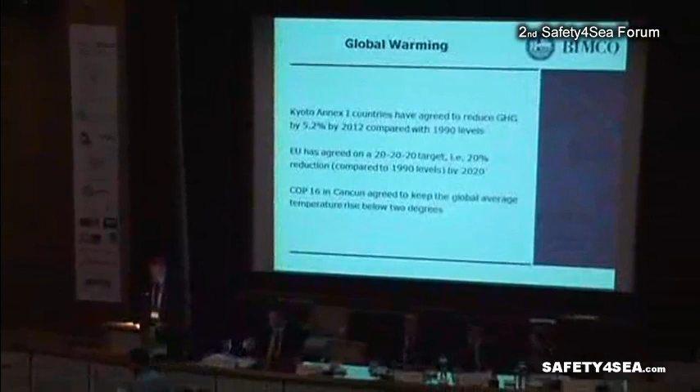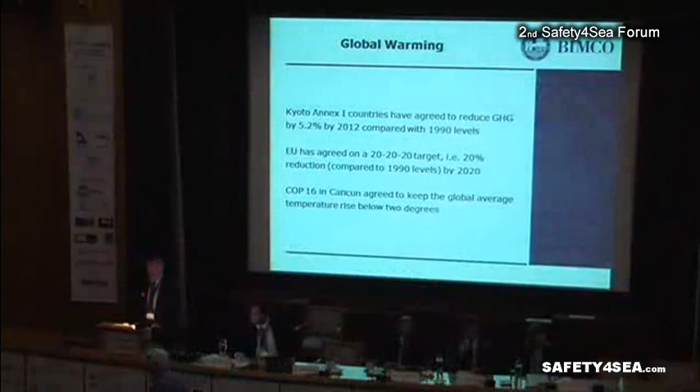Global warming and climate changes have been high on the agenda for many years, but what has been done until now? In the Kyoto Protocol, it was agreed that developed countries should reduce their greenhouse gases with around 5% by 2012. However, countries like USA and China are not part of this agreement, and it's not very likely, even if the 5% is reached for the countries being a part of this agreement, that the effect is particularly significant.

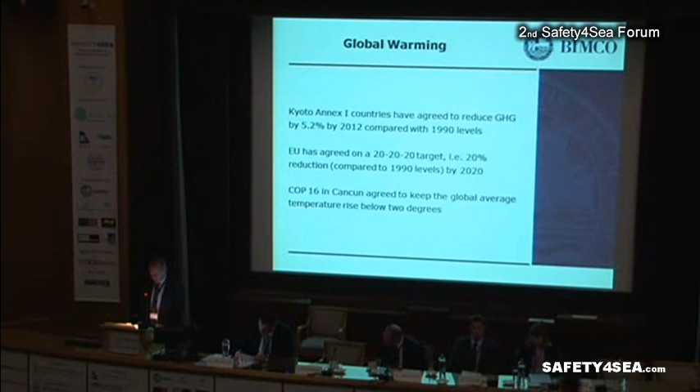EU has made their own targets and intend to lower their emissions with 20% by 2020. Baseline is 1990, and it seems very unlikely that, except for a few countries, the target will be reached, at least as an in-sector reduction only.

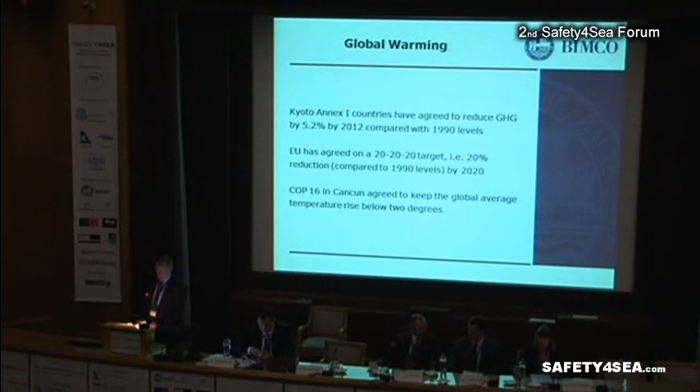Even though the result from the COP16 in Cancun was rather limited, it was agreed to keep the global average temperature rise below 2 degrees compared to pre-industrial period.

So, how much does shipping contribute to the global CO2 emissions? The second IMO greenhouse gas study was launched in 2009. The conclusion in this study was that international shipping contributes around 870 million tons of CO2, or around 2.7% of the global total CO2 emissions.

However, if nothing is done within shipping, the contribution will be around 2 to 3 times higher in 2050. If global warming is not to exceed 2 degrees in 2100 and all other industries comply with this target while shipping does nothing, then shipping will contribute 12 to 18% of the total CO2 emissions by 2050.

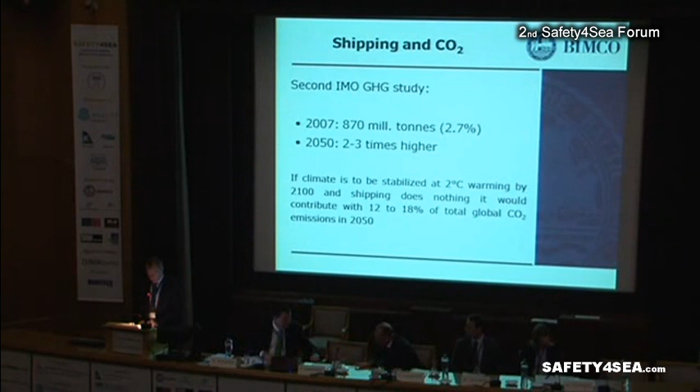So even though the shipping sector transports around 90% of all cargo and only contributes to the global CO2 emissions with less than 3%, we have met a lot of pressure from the society around us.

During MEPC 62, which was conducted in July this year, an international agreement to reduce CO2 emissions from shipping was finally adopted by IMO after years of lengthy and intense discussions.

Our industry can now proudly state that this is actually the first global mandatory carbon dioxide reduction agreement implemented by any industry. It's also very important that IMO is maintained at center stage when it comes to regulation of international shipping.

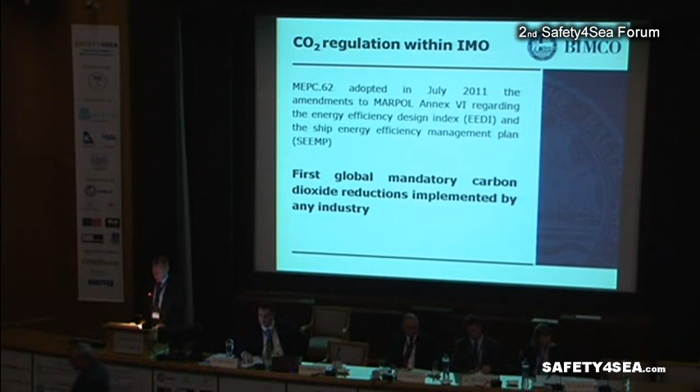If IMO hadn't reached this agreement, we might have seen EU step in and impose some kind of regional legislation. In shipping, we do not generally mind international legislation, but we believe that national and regional legislation will distort competition.

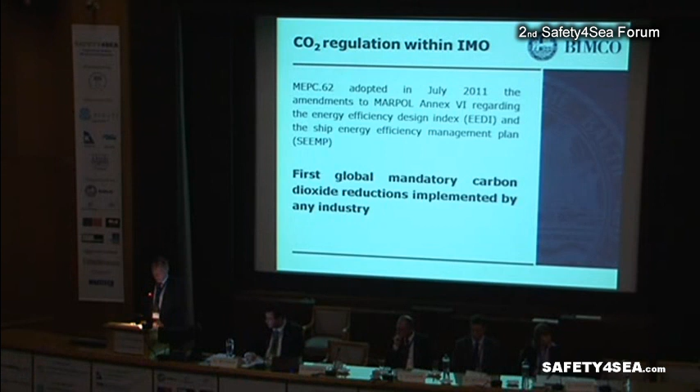7 ship types are presently included in the Energy Efficiency Design Index legislation, namely bulk carriers, gas tankers, tankers, container ships, general cargo ships, refrigerated cargo carriers, and combination carriers, or as we used to call them, OBO carriers. All these ships are deadweight ships.

Passenger ships, ro-ro ships, and RoPax ships are not deadweight ships and do not presently fit very well into the formula for the attained index. Gross tonnage may be chosen as the capacity factor for passenger ships and RoPax ships if these ships are included in the legislation at a later stage.

The amendments to MARPOL Annex 6 will most probably enter into effect in 2013, and will apply to new buildings which are contracted on or after 1st of January 2013, or delivered on or after 1st of July 2015.

The first 2 years, from January 2013 to 2014, the reduction factor will be 0. This does not mean that there's no obligation to optimize the energy efficiency of the ship, but that the attained index must not be above the reference line for this particular ship type.

The reduction factor will gradually increase, and in 2025 the reduction factor will be 30%. Possibly even more strict requirements will be applied in the future.

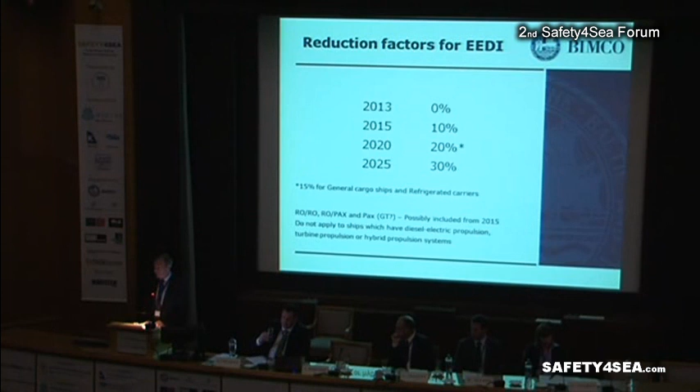In order to have the latest amendments to MARPOL Annex 6 adopted, it was necessary to reach a compromise solution. Therefore, administrations are granted a possibility to waive the energy efficiency design index requirements for a ship for an initial limited period.

However, the perceived risk of individual countries imposing unilateral bans on ships with waivers, or ports imposing higher fees for non-EEDI ships, should be taken into consideration. Worldwide trading by ships with waivers may thus potentially be compromised, and these ships may become hard or even impossible

to sell in a second-hand market due to possible limited trading possibilities. We therefore recommend our members to carefully consider the viability of a waiver for EEDI compliance when new buildings are ordered.

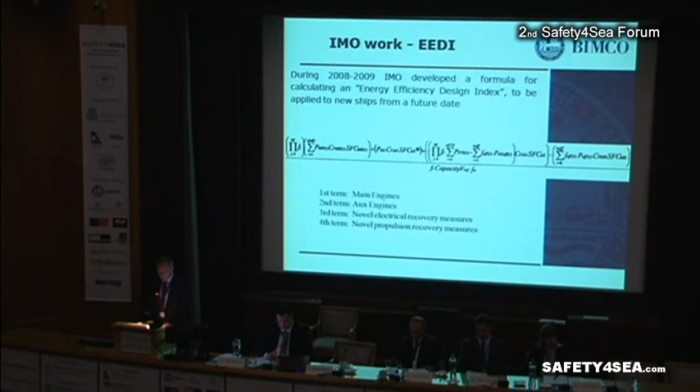Regarding the EEDI, a model has been developed where an attained EEDI is calculated for each new ship. Basically, the formula gives the fuel used per capacity per distance, for example, gram fuel per ton per nautical mile. A model test and a sea trial shall be conducted, and the results shall be converted into speed at 75%

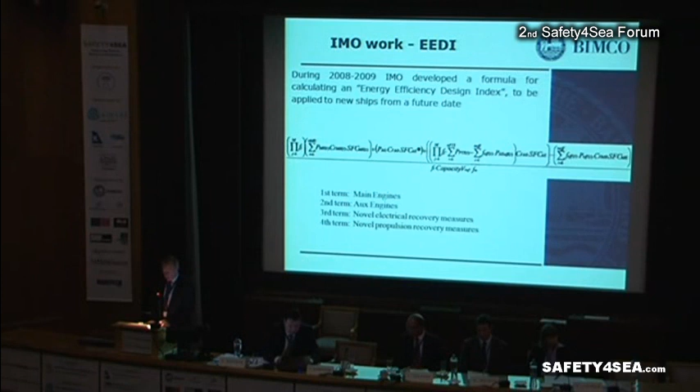MCR with a fully loaded ship. For container ships, only 70% of the dead weight shall be used in the formula. The formula is still being heavily discussed, and for example, the F factors for weather, ice strengthening capacity, and enhanced scantlings are not finalized yet. It also remained unsolved how to incorporate the effect of any shaft generator into the formula.

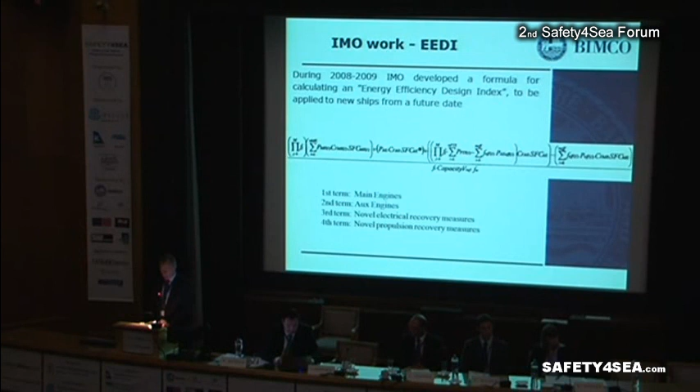The attained index, as found after the sea trial, will then have to be compared with the reference lines of similar ships. When the EEDI enters into force, the attained index for a ship must not be above this reference line. After some years, the attained index must be even lower than the reference line, and in 2025, the attained index must be at least 30% lower than the reference line.

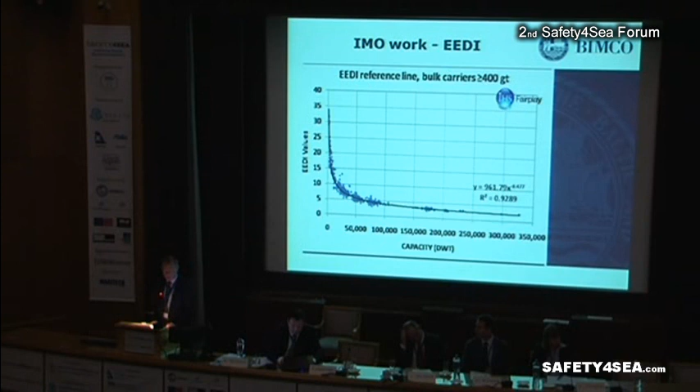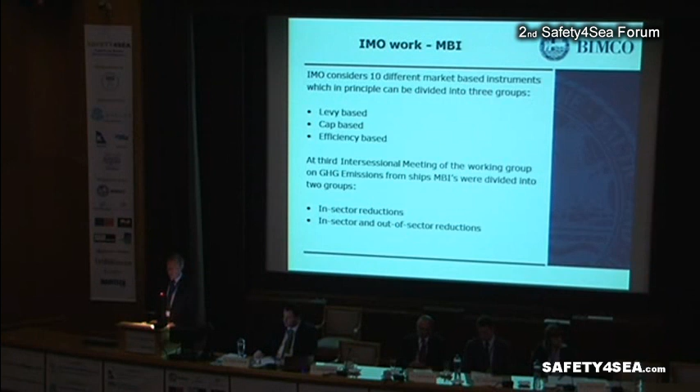However, please bear in mind this is only valid for new buildings. The Energy Efficiency Design Index, or the EEDI, has now been adopted and will enter into force on 1st of January 2013. However, the EEDI legislation will only apply to new buildings, and only a majority of the ship types will be included.

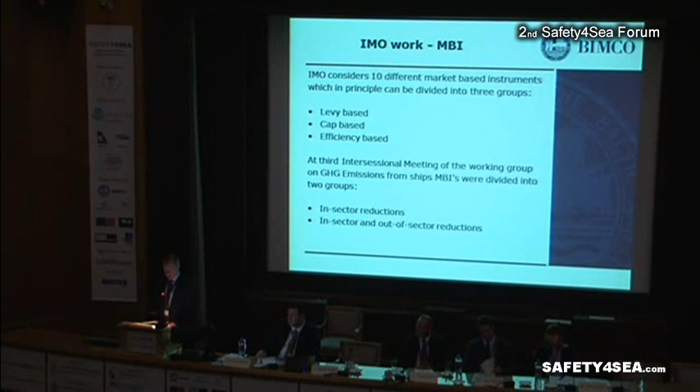In order to motivate ship owners and operators also to lower the CO2 emissions for existing ships, market-based mechanisms or market-based instruments have been proposed as a CO2 mitigating tool for shipping too. Basically, a cost will be added to every ton of CO2 emission from a ship. As CO2 emissions are proportional to the fuel consumption, the owner will get an incentive to save fuel, for example by investment in mitigating technologies. The higher the cost on emission and thereby fuel, the more beneficial the investment will be.

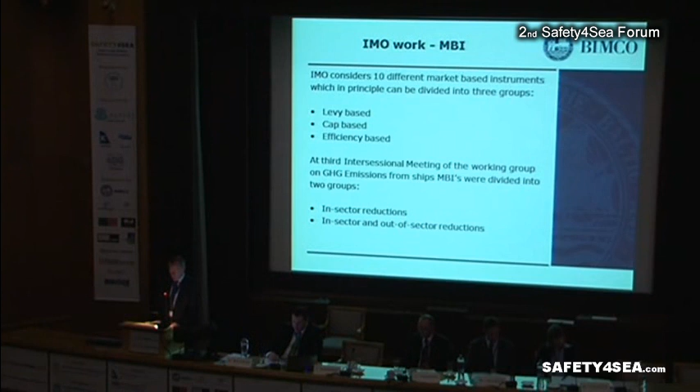10 proposals for market-based measures have been submitted to IMO. They have been evaluated by an expert group and were discussed again by a working group in March this year. Basically, these market-based instruments may be divided into 3 groups.

We got the emission levy, which is a price instrument because it fixes the price, while the emission level is allowed to vary according to economic activity. Then we got an emission cap and permit trading system, which is a quantity instrument because it fixes the overall emission level and allows the price to vary. And finally, we got a proposal for an efficiency-based system where the EEDI would be incorporated in the evaluation of a ship.

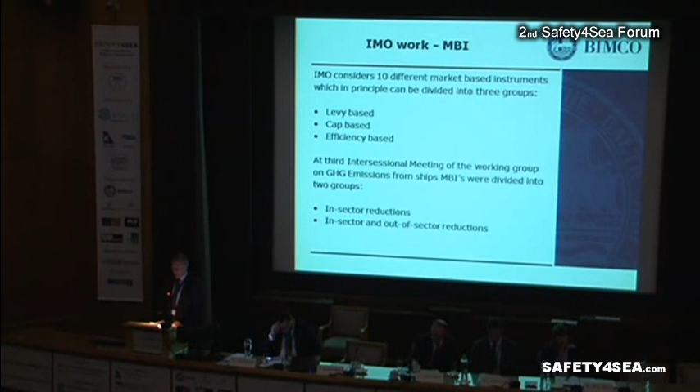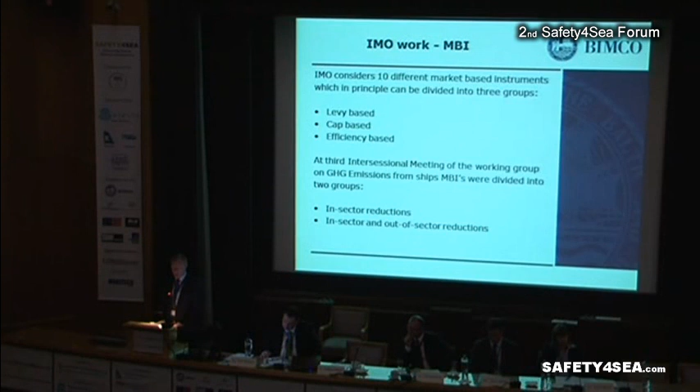During the last intersessional meeting in the Greenhouse Gas Working Group in IMO, the MBIs were divided into two groups, namely MBIs with in-sector reductions, and MBIs with both in-sector and out-of-sector reductions. It is commonly believed that MBIs with both in-sector and out-of-sector reductions are needed if absolute reductions within shipping must be achieved.

Besides the new CO2 emission legislation, sulfur and NOx emission legislation is already in force. Sulfur emissions are regulated in MARPOL Annex 6 and in the EU Sulfur Directive, but local and regional legislation may also apply in certain areas. MARPOL Annex 6 currently limits the global sulfur content to 4.5%, but in 2012 the limit will be lowered to 3.5%, and in 2020, or maybe 2025, the limit will be lowered further to 0.5% only. This will probably mean running on gas oil, LNG, or possibly the use of scrubbers.

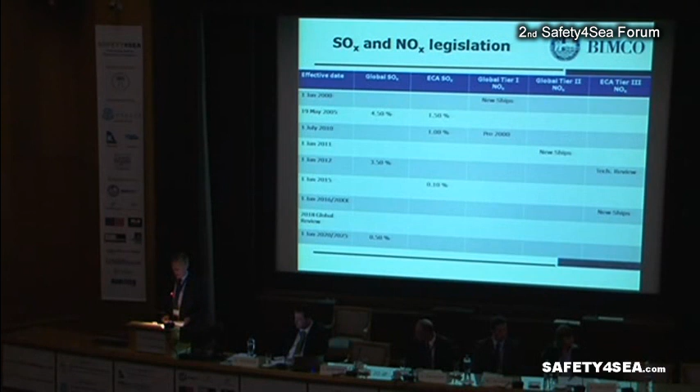Having a look at the emission control areas, the North Sea and Baltic Sea have already been assigned as ECAs, or emission control areas. Present maximum sulfur content in fuel for these areas is 1%, but from 2015 it's 0.1%. The North Sea and Baltic Sea have not yet been assigned as NOx emission control areas, but it seems likely that this will happen before 2016 when Tier 3 enters into force.

North America has been assigned as an ECA for both SOx and NOx and will enter into effect 1st of August 2012. Puerto Rico and US Virgin Islands, also called the US Caribbean area, have also been assigned as both SOx and NOx ECAs and will enter into effect from 1st of January 2014.

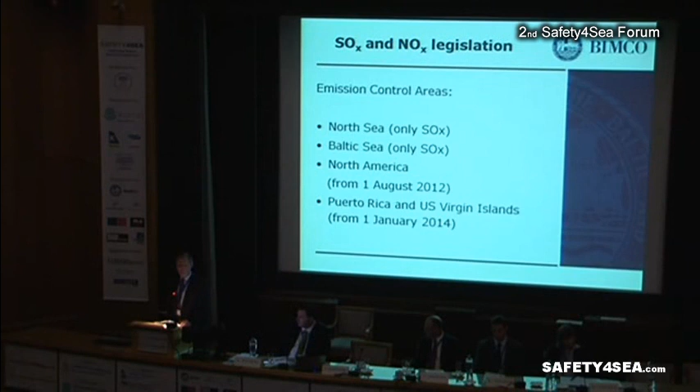The European Commission has proposed a revision of the Sulfur Directive, which will go through the normal procedures within the EU. In general, the proposal is in line with MARPOL Annex 6, and it should be noted that the European Commission has not changed its position despite efforts to weaken the 0.1 ECA sulfur limit, which is applicable from 2015.

The proposal to amend the directive deviates from MARPOL in a few cases. It is not aligned with MARPOL Annex 6 regarding the possibility for states, in the event ships cannot source compliant fuel, to grant such non-compliant ships access to their ports. This could potentially give ship owners compliance problems, as states do not have the possibility of deviating from these regulations.

Another matter which is not aligned with MARPOL Annex 6 is that members of the EU shall ensure that marine fuel is not used or placed on the market within their territory if the fuel sulfur content exceeds 3.5%. Fuel with a sulfur content of more than 3.5% is then not allowed to be used, even in combination with abatement technology.

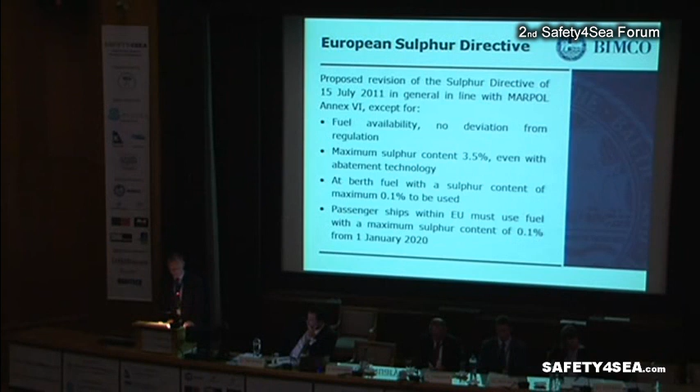This deviation is problematic, as fuel with higher sulfur content is accepted in the rest of the world, and the proposal is therefore unnecessarily prescriptive. You should furthermore note that the proposal specifically requires that the absolute maximum sulfur limit of 3.5% shall apply to all ships of all flags, including ships whose voyage began outside the EU.

At berth, fuel with a maximum sulfur content of 0.1% also deviates from MARPOL Annex 6, but this is already in force in the present EC Sulfur Directive. From 2020, passenger ships within the EU must use fuel with a maximum sulfur content of 0.1%, where the present limit is 1.5%.

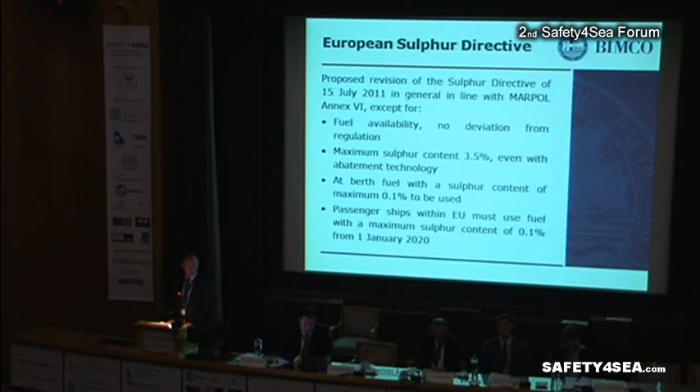Due to the intense and lengthy discussions during MEPC this summer, a lot of submissions and discussions were postponed until next MEPC 63, which is going to be conducted end of February next year. It was also agreed that an intersessional meeting should take place in January in order to prepare as much as possible for the MEPC meeting.

Some of the outstanding items are how to calculate the EEDI. The influence of any shaft generator into the formula has to be solved, and all the F factors have to be dealt with. Survey and certification of the EEDI have to be clarified. It will be necessary to agree upon certain standards on how to conduct the tank test and how to conduct the sea trials.

The easiest way to fulfill the EEDI requirements is just to lower the speed of the ship. However, some organizations have remarked that this could cause some safety issues in case the speed or propulsion power becomes too low to maneuver the ship in adverse weather conditions. A proposal has been put forward to cope with this, and it will have to be discussed further.

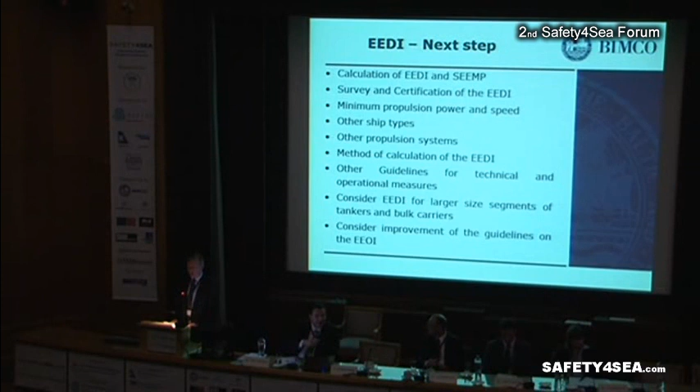Other propulsion systems like diesel electric, turbine, and hybrid propulsion systems are not yet part of the EEDI legislation. This will also be on the agenda for the next meeting.

Some organizations have pointed out that especially the very large segments of tankers and bulkers do not seem to fit into the reference lines. As the small size segment is exempted from the legislation, it may also be necessary to make some kind of adjustment for the large size segment of especially tankers and bulkers.

So, ladies and gentlemen, ship owners and operators are facing some serious challenges within the next couple of years. From 2013, most new buildings have to comply with the new CO2 emission regulations, and some shipyards may have to improve their naval architectural skills in order to comply with these regulations.

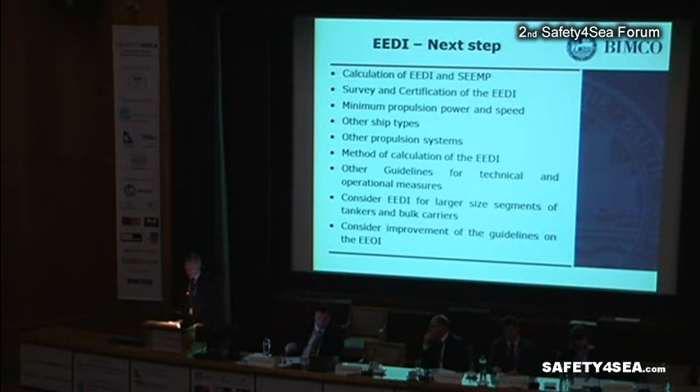From 2015, ship owners operating ships within the ECAs will have to decide whether they will just switch from heavy fuel to gas oil and pay for the very high extra fuel cost, or if they are willing to take the chance and invest in new technology like scrubbers or even LNG, even though the investment is high, the LNG infrastructure is not yet in place, and the future fuel oil price and LNG price are unknown.

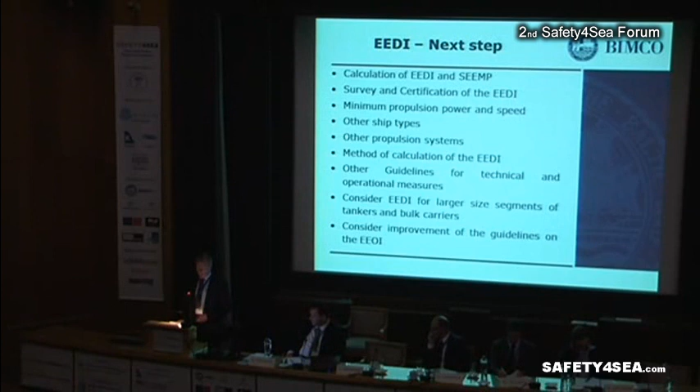So no matter which solution ship owners and operators decide to go for, there are some major uncertainties involved. However, taking the right decision at the right time may very well make the difference of staying in business or not. Thanks for listening.